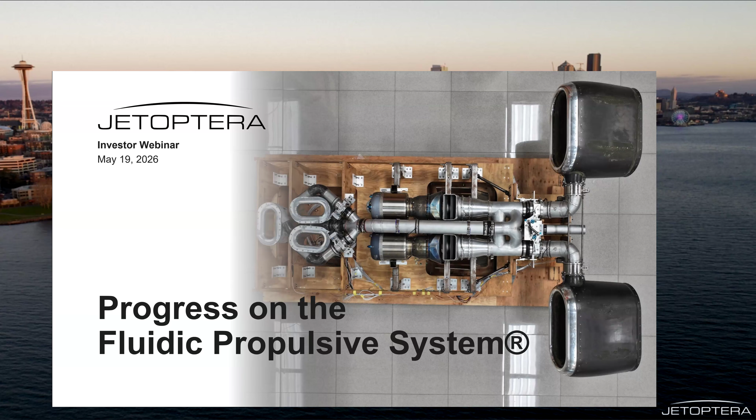Today's webinar is a presentation of the material that I presented about a month ago to the AIAA Pacific Northwest section, where after about 6 years from the last presentation, I updated mostly technical folks on the progress we had on the Fluidic Propulsive System. You see here a picture of it, and I must apologize for my voice. I have been traveling internationally recently, and as always, probably I caught a bug from the plane, but I'll do my best here to hopefully everybody can hear me right.

This is a picture of the current status of the J500 propulsion system, and I will go in more detail on this. Basically, this is the meat of the presentation for today.

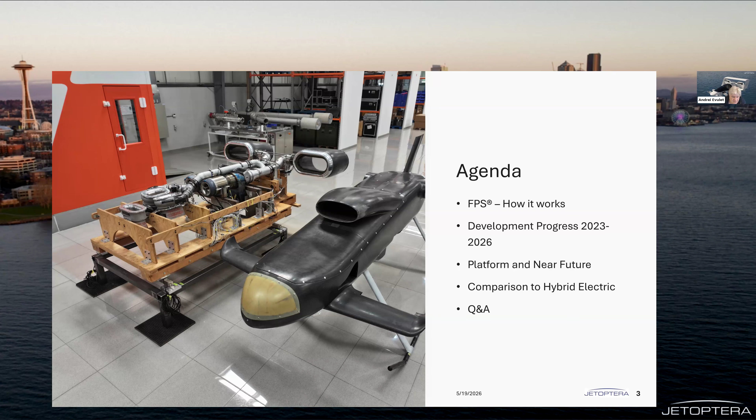The agenda goes over again a little bit of the Fluidic Propulsive System, how it works, and the development progress that happened the past 3 years, platform and near future, and a very important comparison with hybrid electric. And then we'll leave some time for Q&A. I will also give you an update on the recent developments for the DARPA Pegasus team, which is one of the applications we're very excited about, participation in the DARPA Lift challenge.

Just to recap, we have a quite unique propulsion system for aviation that consists of a device that receives compressed air from a turbine. We're energy agnostic, so we could use electricity to drive a compressor or air inlet compressor that sucks in air, pumps it up to a certain pressure ratio, and then distributes it to a manifold that has electrically driven valves, and these valves distribute the compressed air to various devices distributed along the airframe.

In this case, you see an example with one of the largest thrusters we've ever built, up to 300-pound force FPS thruster, and that eventually will weigh only about 10 pounds.

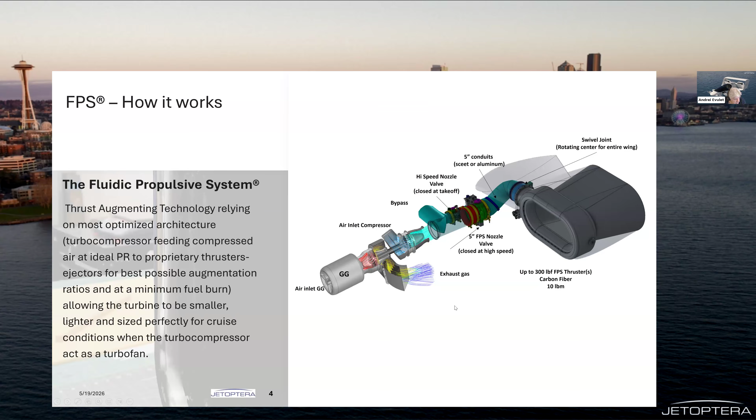But with this addition, with this manipulation of the air, with these tricks we have, we actually entrain more air and create more mass flow rate than the original one. So much so that we entrain up to 15 or maybe 20 parts of air, moving them slower, but creating more thrust. This augmentation ratio is actually: if we created 1 pound force with the original trickle of air, then we would create between 2.1 and 3 pounds of thrust for each unit of air that we put in.

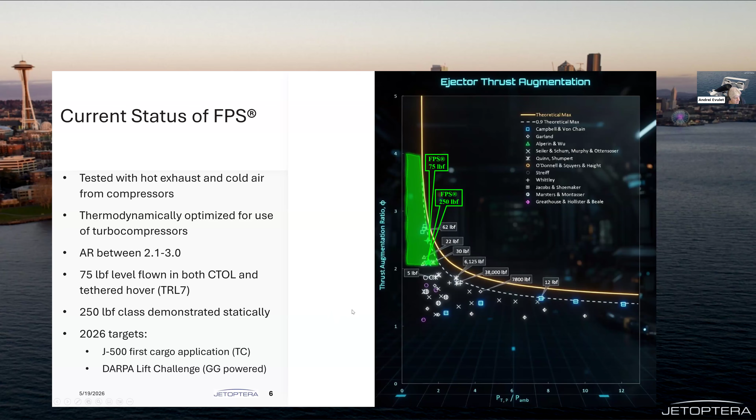So we're positioned very well against the historical data. Where we want to be in the future is this area highlighted here in green. There is room for improvement for lower pressure ratios to produce even further thrust augmentation, which will immediately result in lower fuel consumption and more efficiency.

A description of the key elements of the fluidic propulsive system. What we have is the system I described: the gas generator turbine that drives the air compressors. The air compressors take air in and supply it to a manifold. This manifold distributes the compressed air to 5 locations, 5 thrusters — 3 in the front that are fixed, and 2 in the back that are mobile, swiveling.

In the front, we employ these thrusters only for the vertical phase of flight, and they are all modulated by valves. Each thruster has an electric valve that modulates and sends more or less air. That's going to become very interesting in a future slide because of the response time of this pneumatic system.

The turbine drives the compressors. Both compressors pressurize this manifold, and we control how much flow goes to each of these thrusters. Each thruster generates more thrust than you're entitled to with just that compressed air. If that sounds complicated, hopefully it's not as complicated as it sounds. Basically it's about entrainment of air, and about multiplying the force we're otherwise generating just with the compressors. There's an additional high-speed nozzle here.

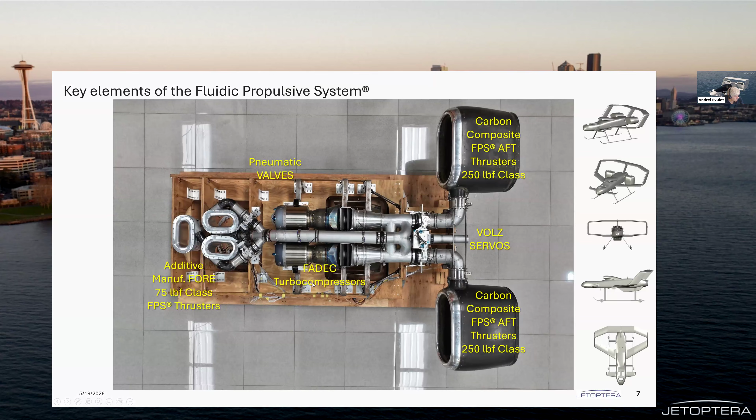It's an ultralight design for adaptive operation, supplying air to FPS thrusters or compressed air in direct fan operation — that's the high-speed pipe I described. The system is titanium alloy built, with elements of 3D printing. It's very simplified in terms of lubrication; for instance, we have greased bearings that don't need much maintenance. It's easy to swap — the system is very modular, so different modules are interchangeable and can be swapped back and forth when you operate it.

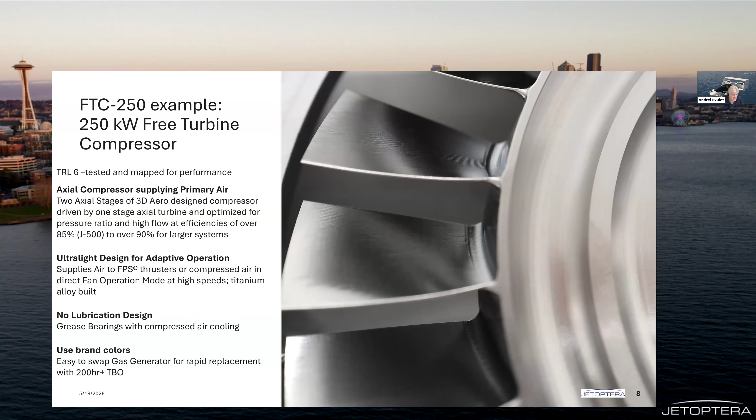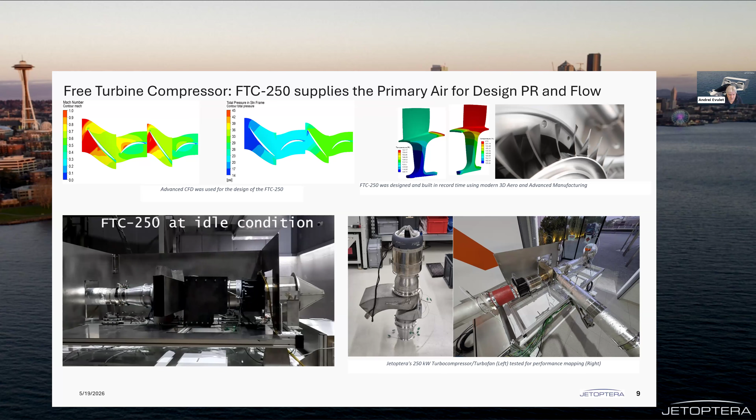At takeoff, we want to accelerate this FTC, this turbo compressor, to operate at high pressures and high flow rates. This results in a lot of thrust created statically to take off vertically. Then at cruise, once we transition to horizontal flight, we park the performance point at a lower pressure ratio and lower flow, just as needed for forward flight.

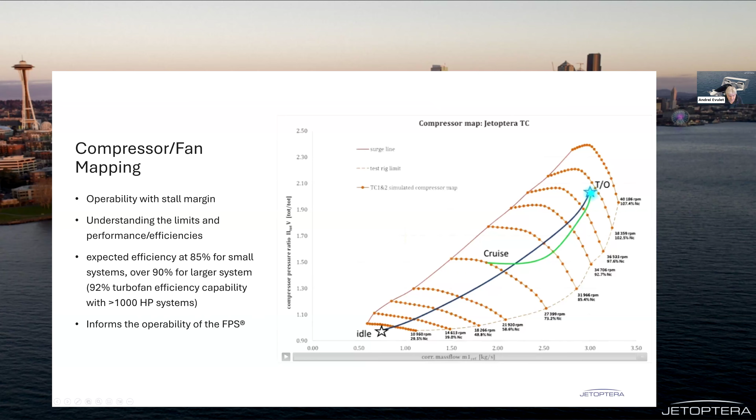The manifold contains key elements called valves, butterfly valves to be more specific. These valves are critical in operating the entire system because as they open and close, they distribute the air from a central source, this turbo compressor, to the thrusters. We have found very interesting performance levels from this.

These valves are actuated electrically by servos produced by a company in Germany called Volz. Maybe you saw some updates there from my recent visit two weeks ago to their facility. They're very excited to work with us.

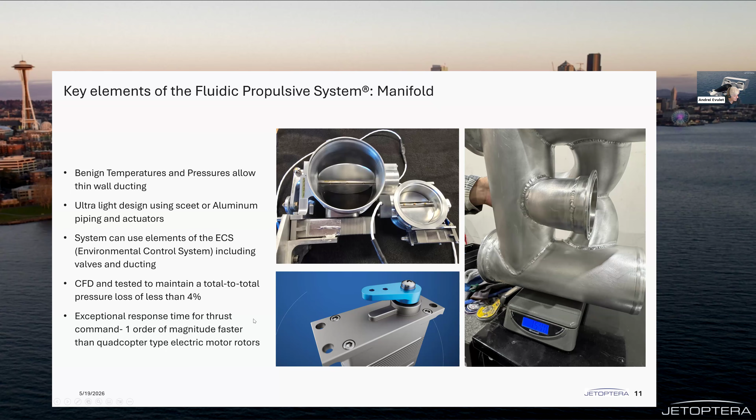It's an extremely light system made out of aluminum. We don't need to make it out of heavier metals because the pressure and temperatures of the air produced by these turbo compressors are benign enough, so we don't burst them open or have any overpressure. The pressure loss to the most distant place, the front thrusters from the turbo compressor, is less than 4%, which may not mean anything to you, but it's a very low number in terms of delivering high efficiency to the entire system.

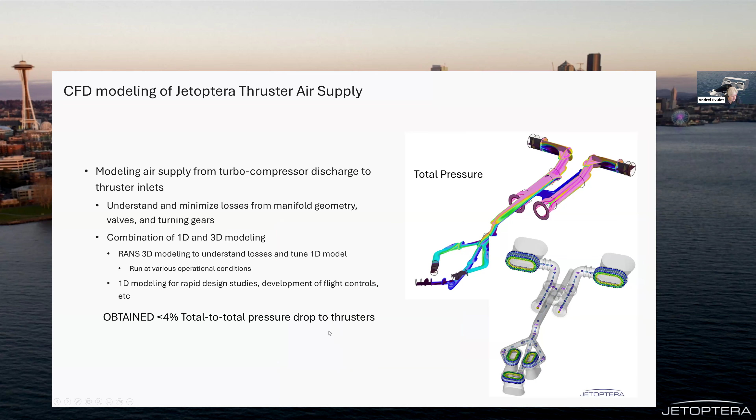As I mentioned, we employed very accurate and fine-tuned and calibrated CFD. This is one of the things that makes us very confident. We have developed tools in the past 10 years that very accurately describe the system, the pressure losses, and the flows.

One of the discoveries we made last year was this amazing property that the response time of our actuating the valves is extremely fast. What it means is that when we're running a test or we're in hover and we have a gust of wind, this actuation of the valves results in immediate production of thrust in less than 50 milliseconds.

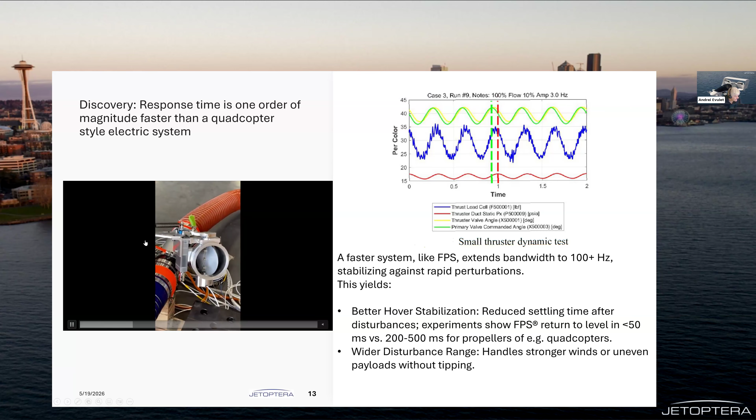What we did here to find that was to actuate the valve during one test at various frequencies, which you can see here: close, open, close of the valve, and then observe the response time of the thrust. As you can see here at higher frequency, the valve opens and closes.

Why is this important? It's important because we can respond to a gust of wind or any perturbation about one order of magnitude faster than a similar system with rotors or propellers.

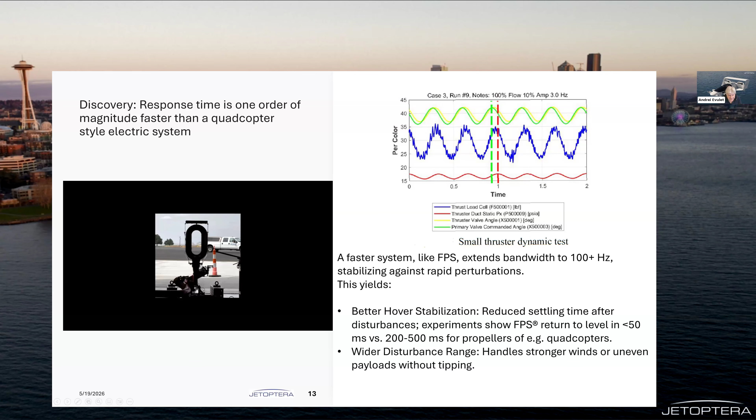Typically a quadcopter or any of these eVTOL systems that employ rotors respond in about 200 to 500 milliseconds to a command to change the load on the propeller and change the thrust. That is very slow compared to us. In less than 50 milliseconds we respond to such a perturbance, and we can therefore control the aircraft much faster than any of our competitors can.

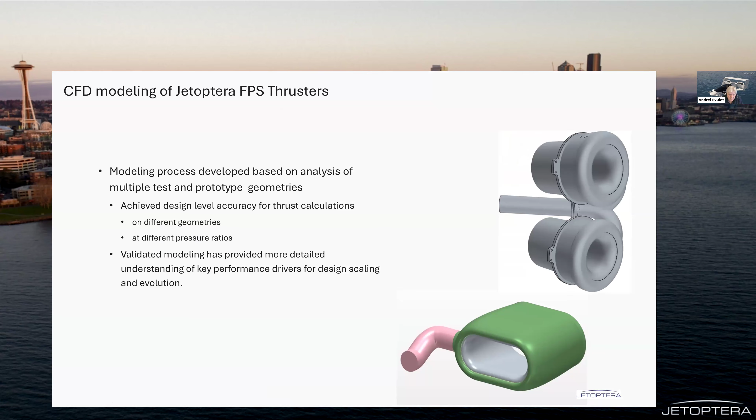We fine-tuned the CFD of all of our systems. You see here two examples: at the bottom is the volume of the CFD for the J500, but on top it's from a different project, a powered parafoil project that we worked on in the past.

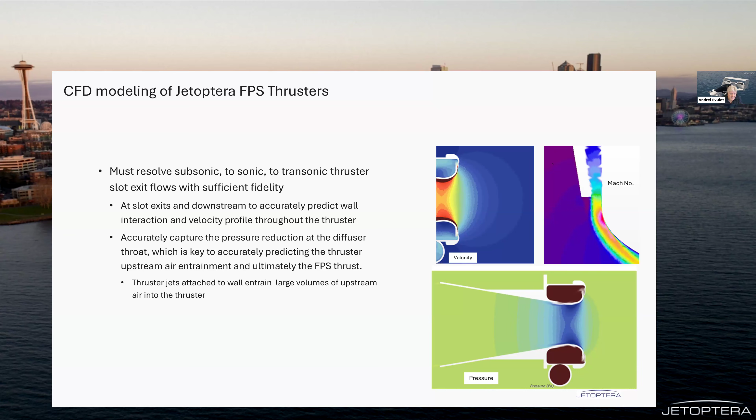Most importantly, we have a lot of data that calibrated our CFD. CFD is useless without some calibration, so we've spent many hours getting the experimental data to validate our tools. That makes us special because now we can talk about using these tools to further scale up our systems with very reliable tools. This is something that was lacking in the past.

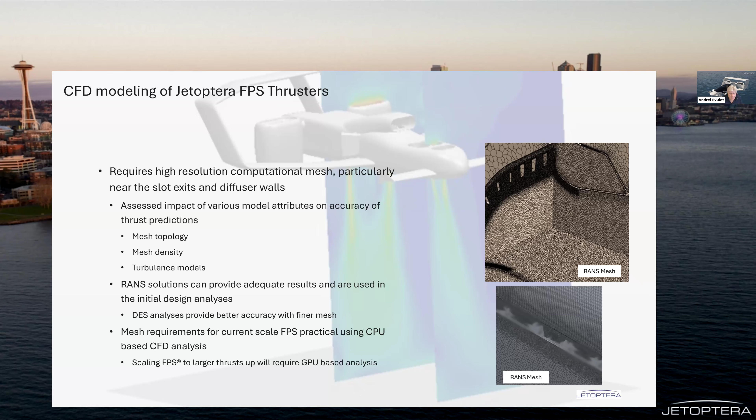In the 60s and 70s, when they were trying these ejectors, they never had a calibrated CFD tool, and that's why they abandoned that path. But today we are, as far as I can tell publicly, the only company in the world working on ejectors that has tools to develop these ejectors properly.

Also, since last time I updated AIAA, we have conducted a number of tests thanks to our Aerotech company. All these components have been meticulously evaluated as separate elements by AeroTEC, a company here in Seattle that specializes in certification of flight components as well as entire aircraft.

This is one of the most capable companies in the US and probably in the world, and has in the past been employed by Mitsubishi, for instance, to certify their brand new Mitsubishi regional jet. That was about 2019, 2020.

Certification they did with the FAA. It is very likely that we will employ the company Aerotech for certification under Part 108, for instance the cargo drone we're developing under a different program, but also for the J500 and for manned applications under the Mosaic new FAA initiative. So we're very likely to collaborate further with Aerotech.

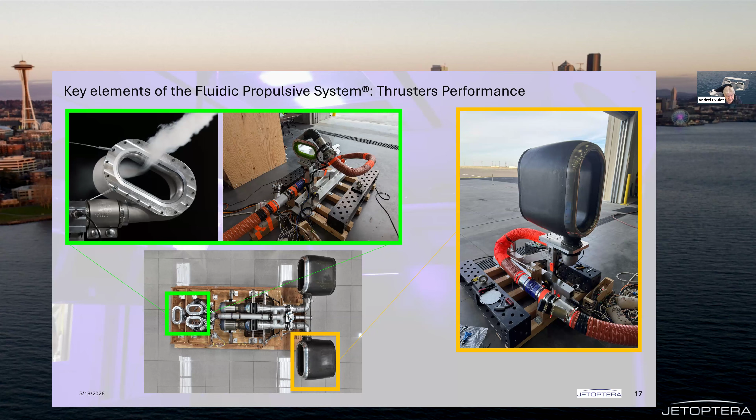Further, we are now in the phase of testing in Dubai. At the bottom in the left corner, you see the FPS system currently in Dubai at the EANAN facilities being tested with the turbo compressors on, and characterized there statically.

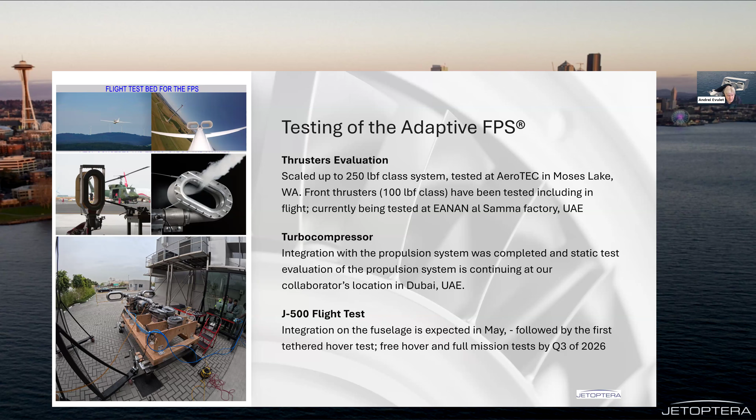But to get there, we evaluated the thrusters at AeroTEC, and we evaluated the turbo compressor for mapping. Now the next steps will be the static tests on the fuselage, so the entire system will be transferred onto the fuselage, then followed by tethered hover tests, free hover, and full missions by Q3 of 2026.

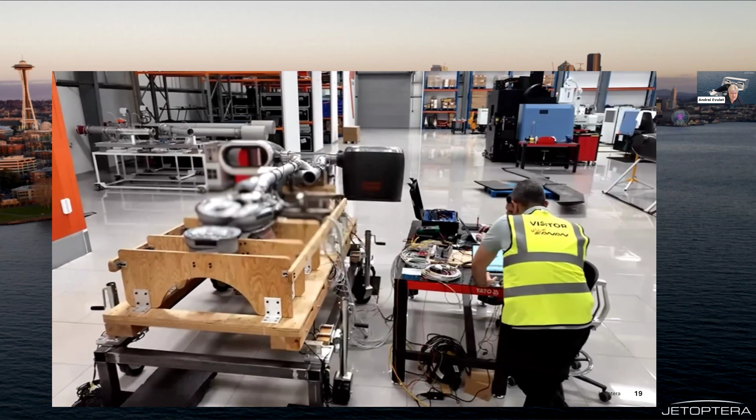There's a video here on the floor of the EANAN factory with the system being prepared for another test. These are two employees preparing for and actuating, making sure all the servos are working properly and all the valves are opening and closing. After this, they would run a test.

One of the things that I updated AIAA and the audience on was also the acoustics. As a reminder, we have conducted thorough investigations of our thrusters versus other technologies. As you recall, one of the main characteristics of the FPS is that the thrusters are atonal. They form no tones because we don't chop the air.

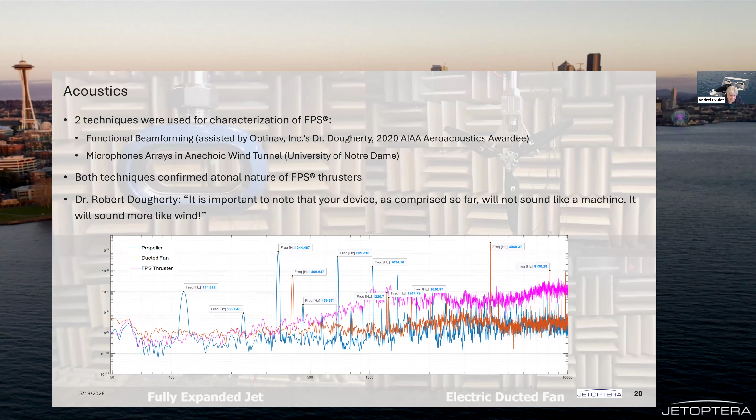One of the things I addressed during this session was the emergence of fascination among many of our competitors with hybrid electric. So the chapter of battery-only is kind of closing right now. People have realized that the battery is heavy and has not performed so well in terms of increasing specific energy. Now everybody's talking about shifting to hybrid electric.

Well, a hybrid electric system is basically a turbine in general, or could be a piston engine, that drives a generator, that drives an inverter, that uses a smaller battery that's being recharged at all times. And then it generates this electric power that is then being distributed.

I caution the audience about the fact that you're opening another can of worms on the hybrid electric, in terms of introducing so many other systems and subsystems that all need cooling and auxiliaries to perform this heat transfer. You end up with a rather monstrous system that's three times heavier, twice as expensive at least.

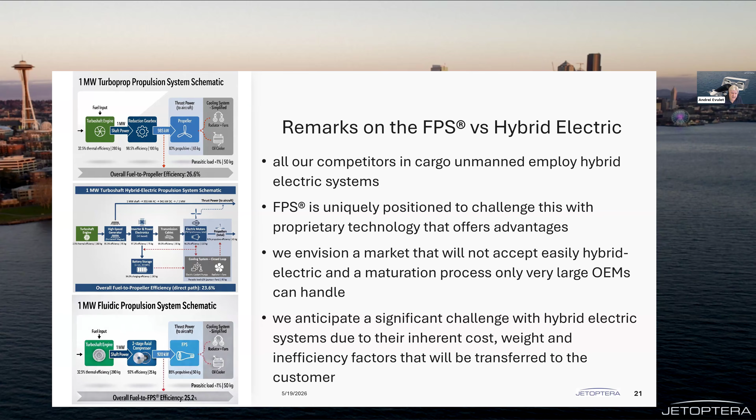This was actually illustrated back in the First World War, when a French engineer named René Devillers calculated — and this work was secret back in 1916 — the range of French bombers that would attack German positions. This engineer applied math that's still applicable today about the range of an aircraft, which varies logarithmically, non-linearly, with the range you can achieve. In other words, the higher the fraction of fuel on board an aircraft, the further you can go in range. That was considered secret at the time.

As always, an engineer's name never makes it to the Hall of Fame — instead his friend, Louis Breguet, promoted this approach and explained the benefit of putting more fuel on board the aircraft. For those interested, you can still buy a 1918 edition of Dynamics of the Aeroplane, written by René Devillers, in which the Breguet range is explained.

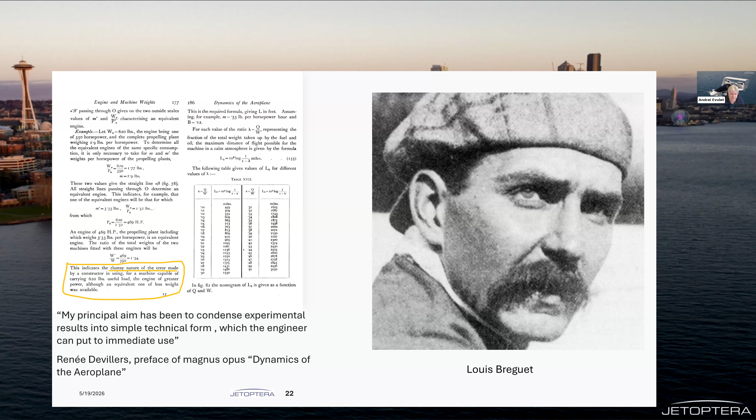So it's extremely important to put more fuel on board, because as you get lighter, you fly more efficiently and you fly further and further. What is the effect of that?

If I compare a one megawatt turboshaft hybrid electric with a one megawatt fluidic propulsive system, these are the numbers: we would go at least 25% longer in range, we'll burn fuel at 10% lower rate than the hybrid electric, the weight of the propulsion group would be 50% lower in our case. Cost, because of all the auxiliaries and other elements — motors, inverters, etc. — all cost a lot of money, and we are much simpler than that. The operational cost, which will be transferred basically to the customer eventually, is going to be about 75% lower.

These are very mathematically well understood numbers. And obviously, our technology — as a reminder, we have 189 patents awarded to date — is quite unique, and we have a nice moat around the technology, so we can protect it, and we are the only ones who can use it.

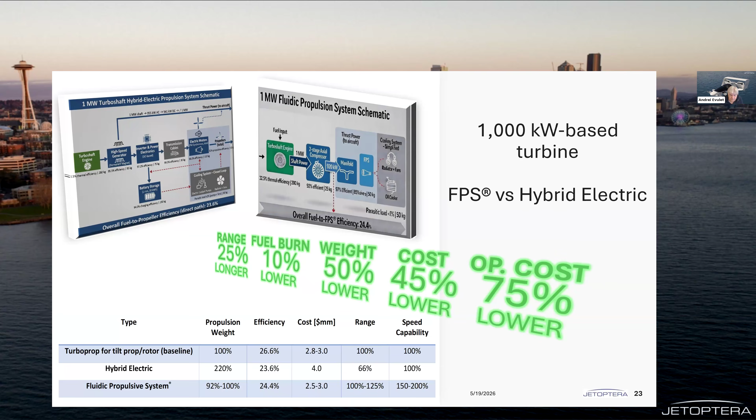So now we move into the other project that I want to give an update on, and that's the DARPA Lift Challenge, the Pegasus. As you recall, over the past 5 months, very intense months, we've been very busy demonstrating pieces of the technology and putting it together.

Starting with the tests we conducted in February and March of the propulsion system we developed. This is a much simpler system in that we're not using a turbo compressor. We're just using small turbines to use the hot gas to drive the fluidic propulsive system. The reason we went to that approach is because we have to keep the entire system to less than 55 pounds, or 25 kilos in SI units.

It has to lift at least 110 pounds payload, and it has to complete, per DARPA, 22 turns over 4 miles. So that's kind of a mission that everybody's scratching their heads about. We would prefer just going around, and that's how we're going to start the test, by just going around 4 miles to show DARPA that basically we can do this, were it not for a complete crazy mission like 22 turns. But we're going to attempt, obviously, to do both.

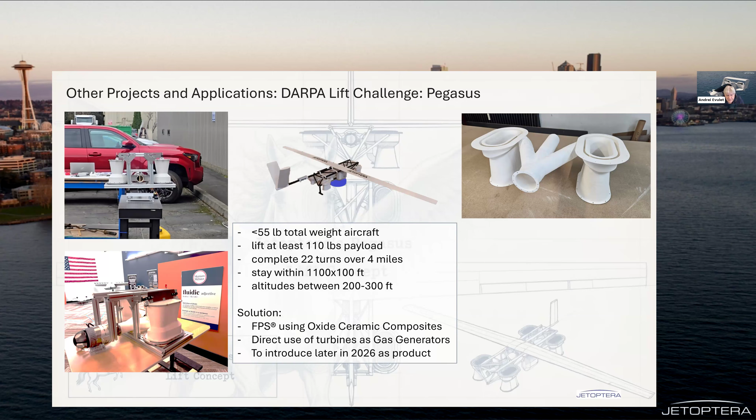We are very well positioned because we are developing systems that are ultralight. The power of the turbine is undisputable, and we can pack a lot of power in a very light system. To that end, we are using ceramic matrix composites made also in Germany by a company called Walter Pritzkow. We've collaborated with them, if you recall, on testing on our glider, our flight test platform, and we are employing these as well.

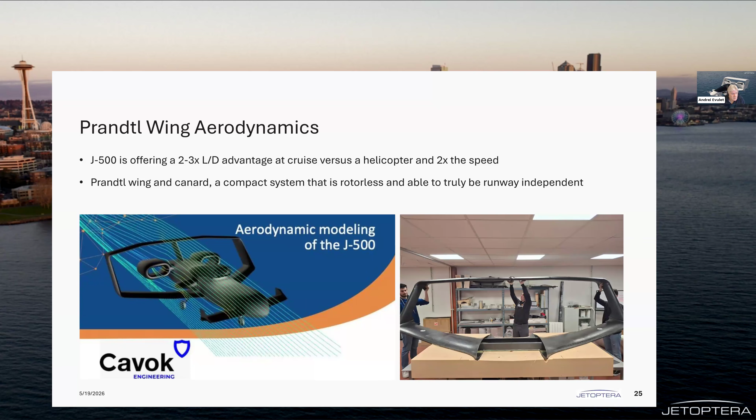But basically, why do we think we're going to be a winner here is because we have developed a unique VTOL capable propulsion system that is this adaptive fluidic propulsive system. It's extremely light, and it's based, the only one in the world that we're aware of, based on ejectors to minimize weight and augment thrust in a very small package.

These turbines are now used as gas generators using jet fuel. We will be able to achieve unique high-speed wing-borne capabilities with efficient VTOL capabilities. That's something that, for instance, a large rotor, which we think are going to be the other competitors, will not be able to achieve.

We have developed a unique control system that controls aircraft attitude 10 times faster. Remember what I mentioned about the valves and our discovery from last year, that we're 10 times faster response versus multicopters. We use unique materials, as I described, the CMCs.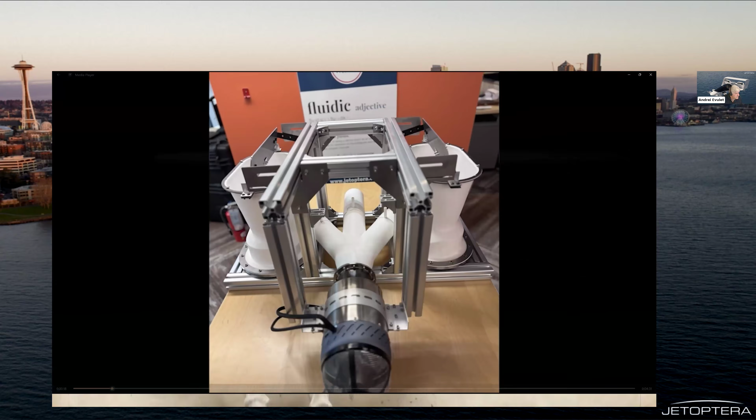So this is a description of what we did so far in the past 5 months. This was also transmitted, presented to DARPA Lift Challenge. We started with a static test of the system.

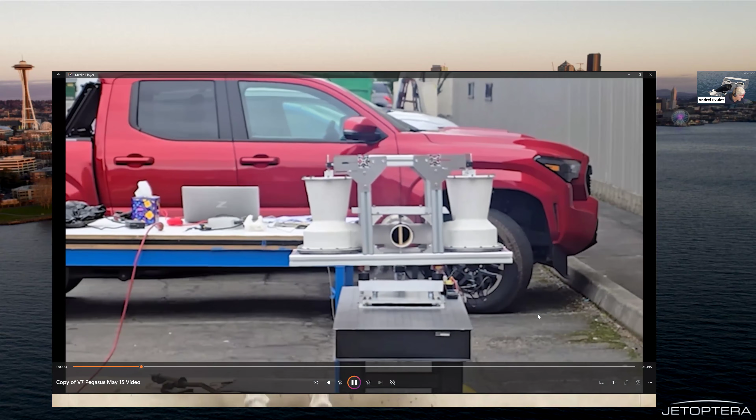Here, in this case, it's upside down for reasons of measuring the thrust. This platform has been measuring the thrust with the use of load cells. This is only half the system, so to speak. And this was tested in the United States in February.

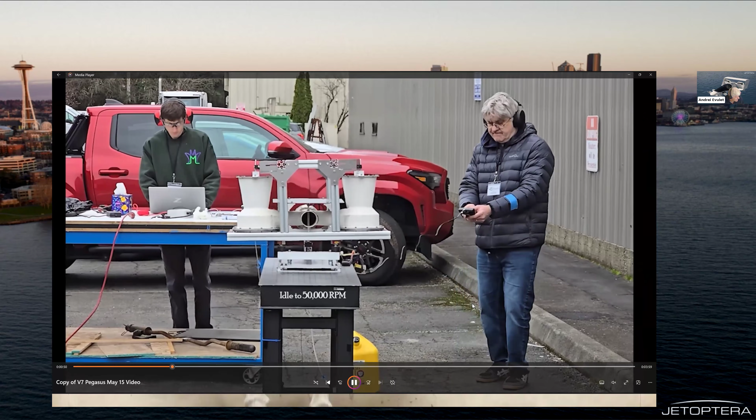Yours truly is controlling the flows here, controlling the turbine with Sean, our engineer, taking notes and making sure that we collect the data.

Again, we're the only ones that will use non-prop, non-rotor systems for this challenge. So pretty excited. We think we're in a very good position to at least win the most unique propulsion system, that comes with a $500,000 DARPA award. But we're looking forward to compete successfully.

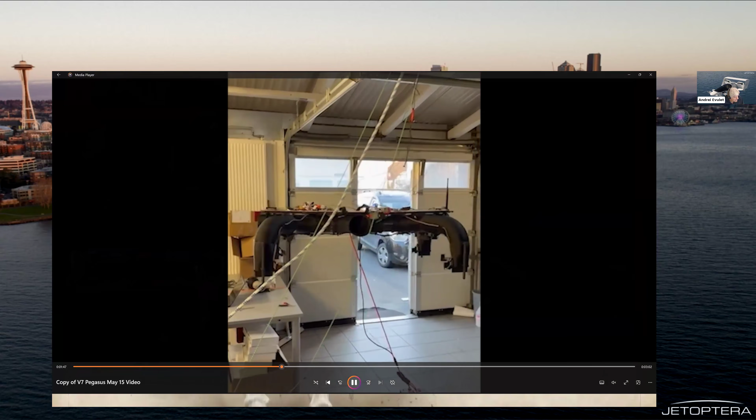Now, the controls of this thing is also very important. And to that end, we have been developing the controls on an electric system to autonomously control the platform. So in this case, we use the electric ducted fans just to perfect the controls, the brain, if you will, of the system.

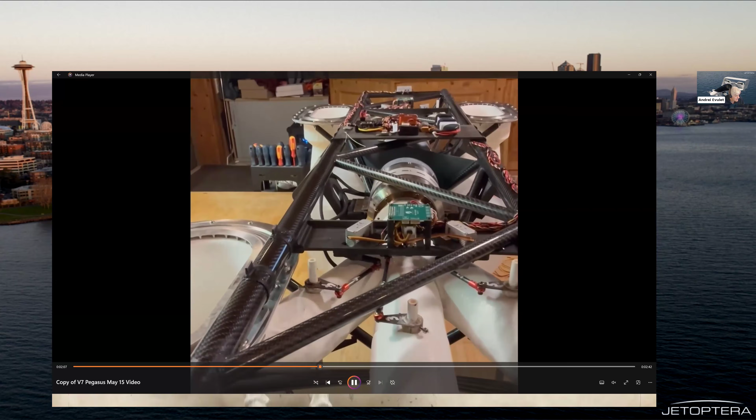As you can see, we placed the batteries on the floor because they're very heavy and we couldn't take off with that. By the way, this DARPA challenge we think is going to be a no-go for anything electric, simply because the battery needed for that mission to turn 22 times is just too heavy and is going to put them over 55 pounds, the weight of the aircraft.

So this is filmed in Germany a week ago. I traveled there where we put together the frame. I'm happy to report tremendous progress here. You see here a carbon fiber frame that holds everything together. You see the control system that I just showed you in a video with an electric, now transferred to this system. And the frame is ultra light.

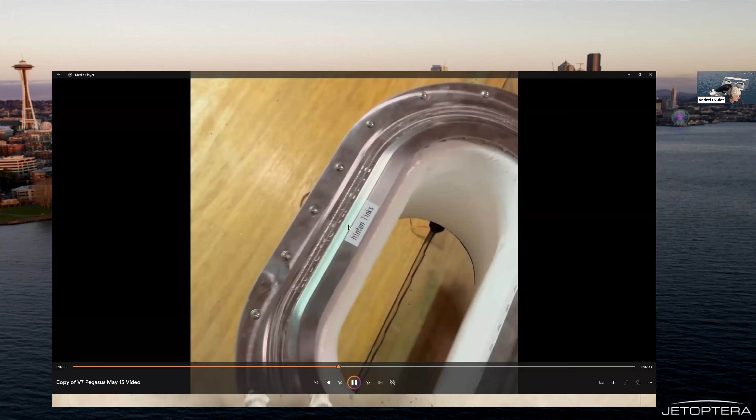It weighs just shy of 2 pounds, the whole thing. The ceramic thrusters use titanium aluminum alloys, very light. There's the two engines on board, procured from JetCat, another German company. They act as gas generators. Then you see the cube, that's the brain of the system. This is basically the flight controller that will dictate which valves are opening and closing at what time to control the attitude of the aircraft.

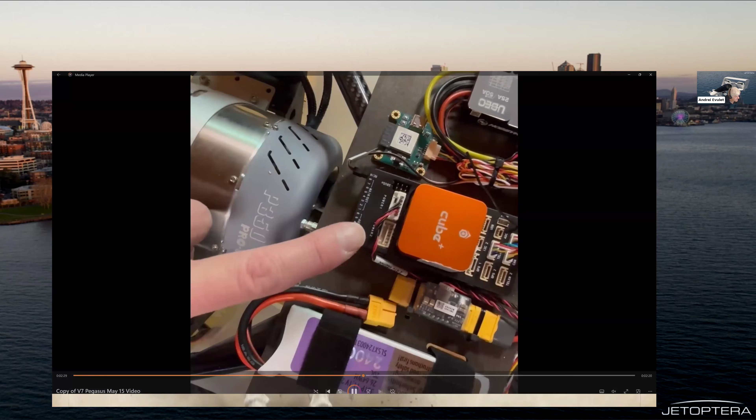This also controls the throttle and the RPM of the engines themselves. We have a large number of servos on board. Like you see here, each of the servos, there are three of them. One is under this extender, a can extender. And you see the valves here, 1, 2, 3 at this end. These servos are controlling the valves in opening and closing. The number 5 here is, for instance, for one of the thrusters.

The one in the center is for the high-speed nozzle. So again, just like in the case of the J500, we're controlling the hot gas this time. As you can see, opening and closing in sync, the vanes and the control valves.

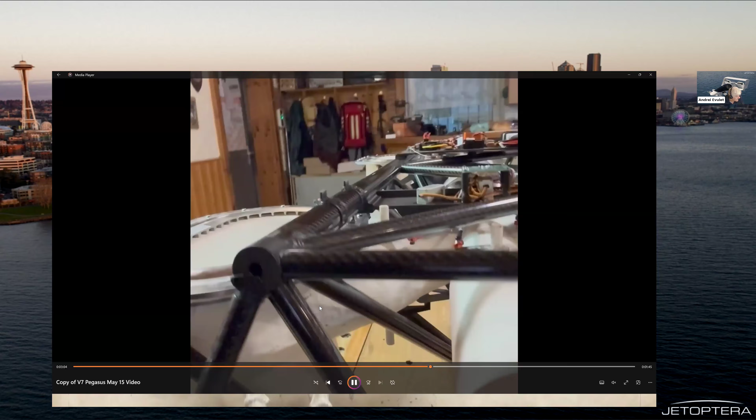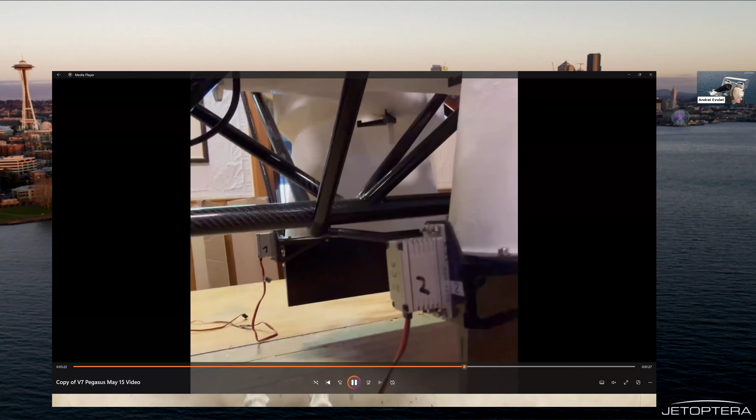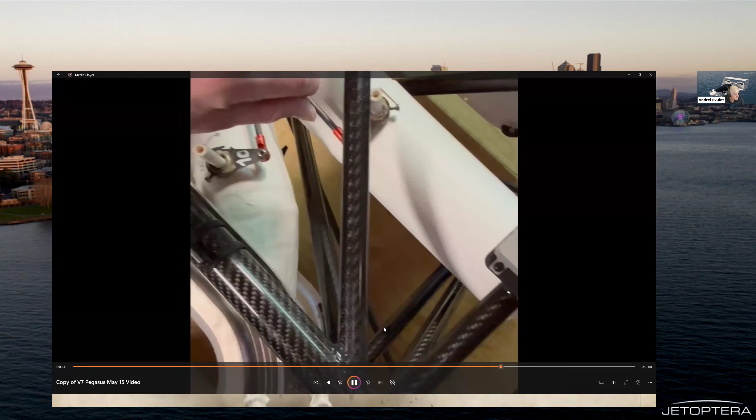Then we have the thrusters, of course, which we have already tested. This is another thing that is very lightweight. These are literally the fuel tanks or bags specifically designed to be very light and contain the volume that we need for the mission. Then there's the servos that control the valves, the flaps at the end of the thrusters that will redirect the efflux coming out of the thruster. So the efflux coming downwards, after entrainment on the top, the air is being mixed with the hot gas and it's coming out at a mild temperature of 200 degrees or so due to the mixing.

Now, the other thing is, I'm proud to say that we are now at 21.14 kilograms for the entire system, which is about 46 pounds. This is including everything. So this is an amazing number, and it's going to play a role in the Part 108, because we will be able to build a 110-pound aircraft that can carry a lot of fuel and is going to be less than 55 pounds in hardware, making the usable payload...

...meaning a combination of fuel and payload, cargo, for instance, available to perform much better than, for instance, Amazon Prime's Mark 30 drones. So we will be able to go much farther, carry 50 pounds of payload if need be. Remember, as a reminder, Amazon Prime is only able to deliver 5 pounds or less, and only 7 kilometers away. We will be able to do 25 mile runs with 50 pounds of payload down the road.

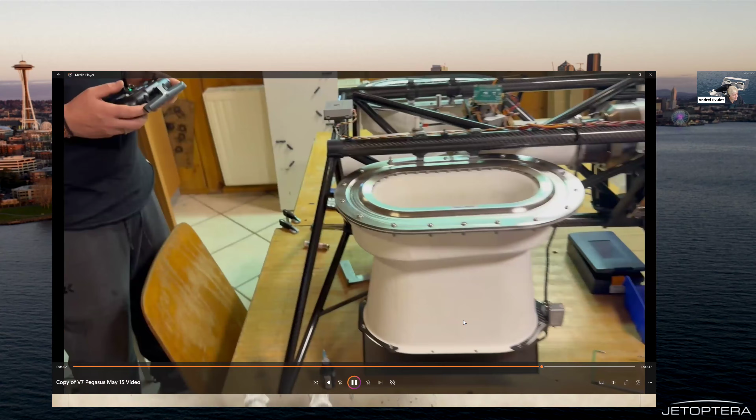So my point being that this development that we're doing for DARPA is not only important for DARPA and is not a competition only, but it will result in another product of Jetoptera that with a simple design can actually outperform anything out there that's electric or hybrid electric in the Part 108 system. So we're very excited about this.

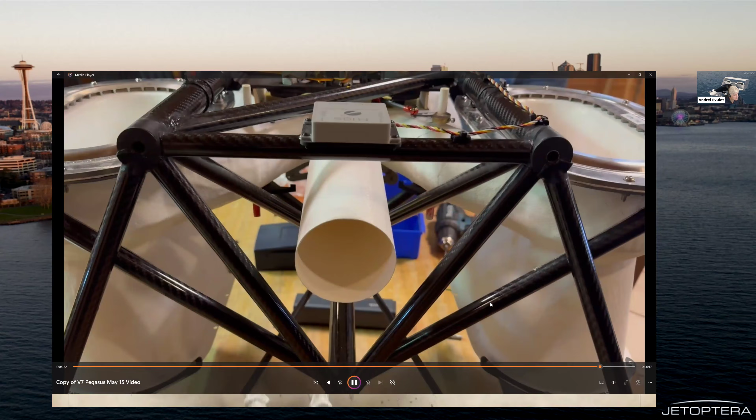You see the valves at work here, again validated by the controls. And as of last week, we put this on a tether and we started the testing. We have some bugs to debug, but that's very typical of the system. We're very optimistic about running these tests with tether mode in May, free flight with transition in June, increasing payload towards target in July.

In June and July, we're going to run this test at Pendleton in Oregon. So we'll bring the system here and we'll be ready for the competition in August, which is in Ohio, Dayton, Ohio, at the U.S. Air Force National Museum. And with that, I will wrap it up here with the conclusion that we have two FPS prototype demonstrations planned for 2026. Both are VTOL. One is the J500, the larger program with Enon, our collaborator in Dubai.

FPS offers, and the other one is the DARPA opportunity. The FPS offers attractive alternatives to hybrid electric for conventional short and vertical takeoff and landing, as well as wing-in-ground effect. Production of the J500 is planned for 2027, and we've seen interest from potential buyers and customers in Asia and the Middle East via Enon.

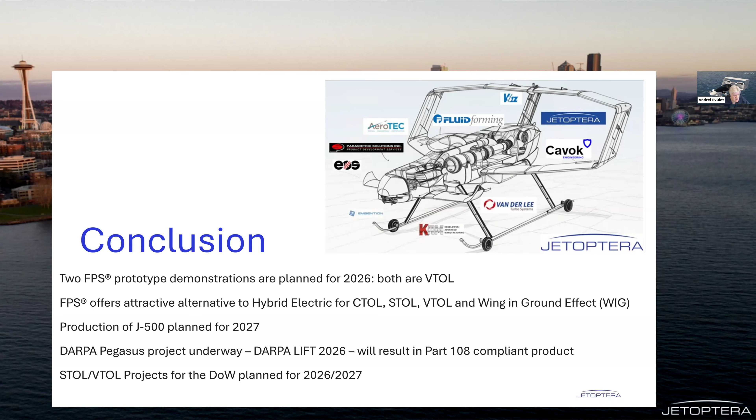The DARPA Pegasus project underway will result in a Part 108 compliant product. We're looking forward to that—it might be an even larger opportunity, we'll see. And we're also pursuing short takeoff and landing VTOL projects for the Department of War.